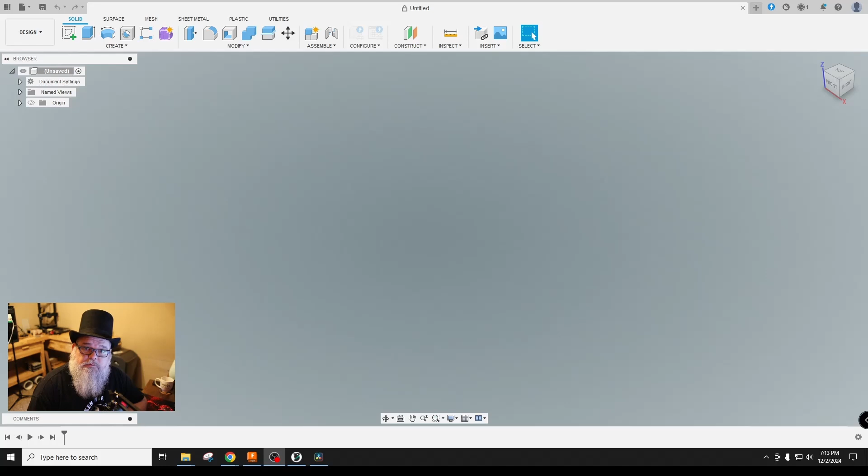We're going to model up a little phone stand. Sound good? Okay, here we go.

We're going to start the sketch on the bottom plane. I'm going to start out with some construction lines. Go 125 by 90. Stretch that dimension out just so it doesn't get in the way. And this one is going to be 40 by 0. Looks good.

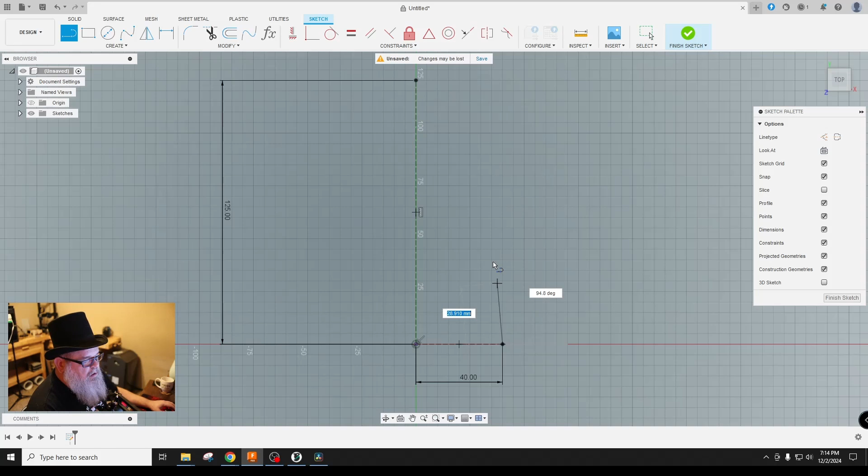I'm going to drop that dimension down below. Turn my construction line off. And do a line from the end of the 40 to the end of the 125. And then I need to mirror that one line, using our construction line as a center line. Just like that. I'm going to throw a radius on top of this.

That is a really big radius. We're going to go 10. Sound good? Sounds good.

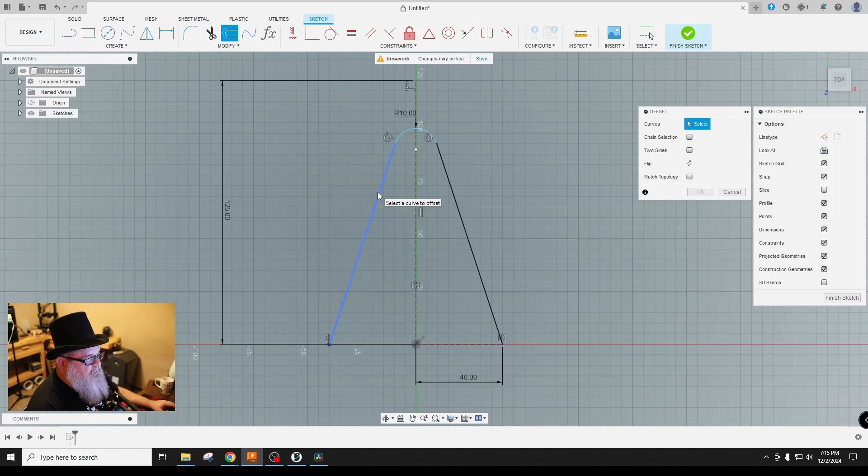Okay, our next step is going to be to offset. We need to make sure we're offsetting the chain. We're going to offset it by 5 millimeters. I want to have a little bit of meat to be able to lay this down on the side to print.

And I'm going to draw a line out there. It'll get trimmed up. Then we're going to come over here. I'm going to draw another line. I'm just going to drag it out this way a ways. That'll work.

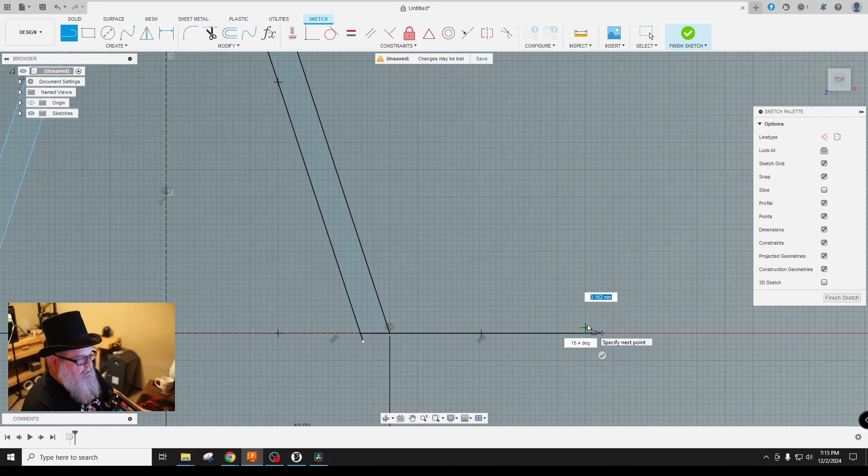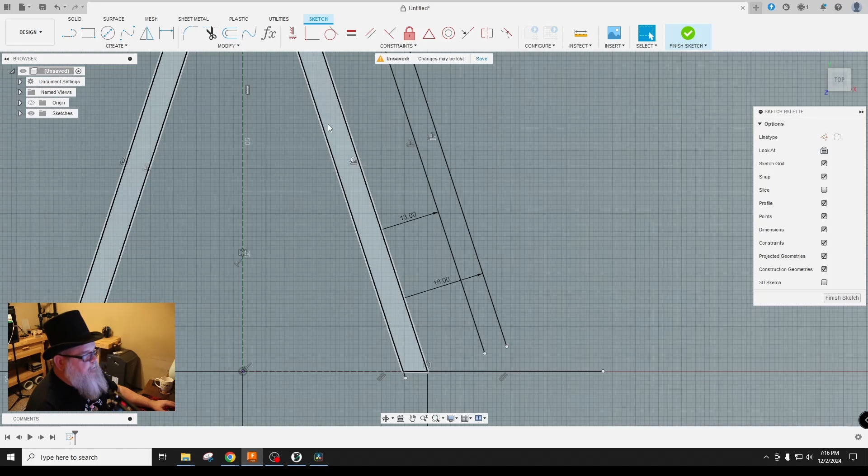Okay, now we need to do a couple more offsets. But this time, instead of offsetting the chain, I'm going to offset just the one line, by 13 millimeters. I'm going to do another offset of that line to 18 millimeters. I'm going to offset the bottom line by -5. And one more time by -13.

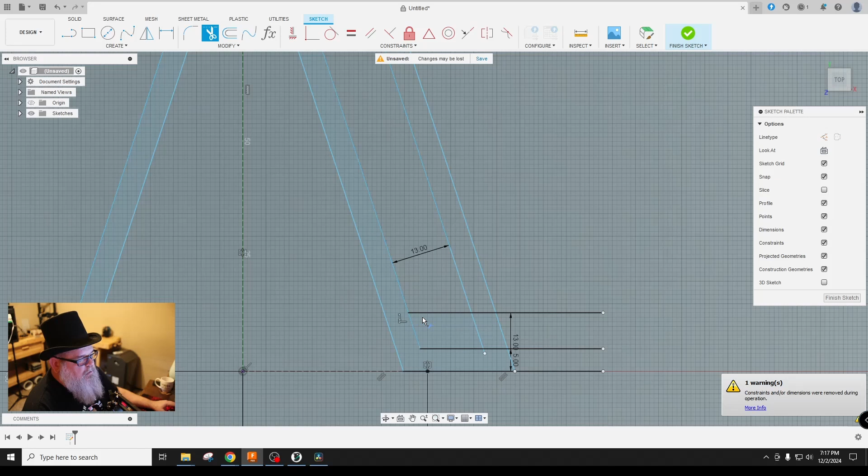I want to extend this line down to there. Now we're going to do some trimming. Trim those two lines to where they meet up. Trim that one. That one, that one. Boom, boom.

All right, there's our basic side profile of our phone stand.

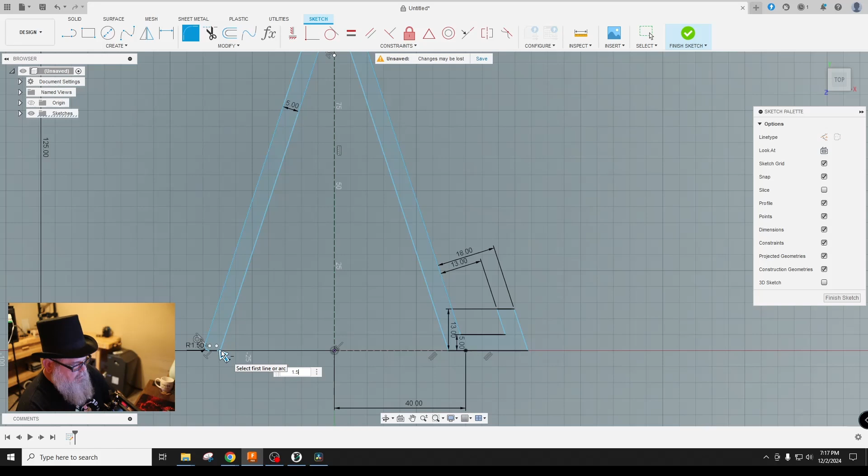Next thing I want to do is add some more radiuses, radii. Radius that one by 1.5. I'm going to do this one by 1.5, so I get some nice little radius corners there.

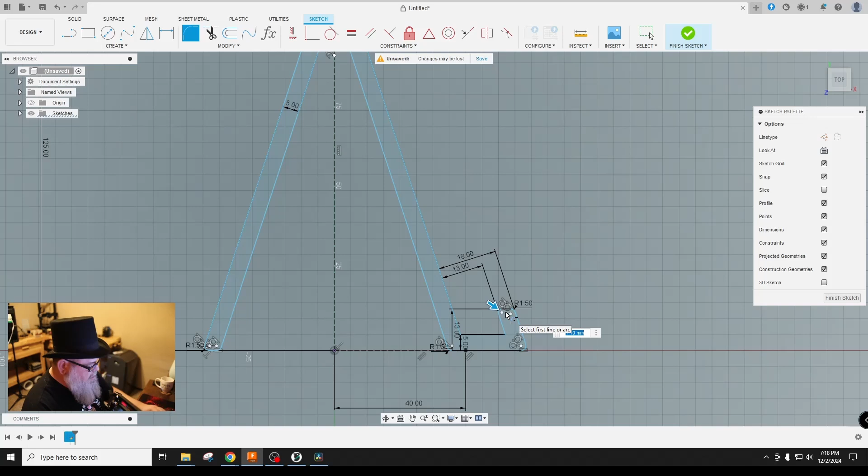.5 on that one. 1.5 on that one. How about we radius that by 1.5? Just type in 1.5. Radius this corner by 1.5.

Now this one here, I'm going to radius it by 2. And that corner there, we're also going to radius by 2.

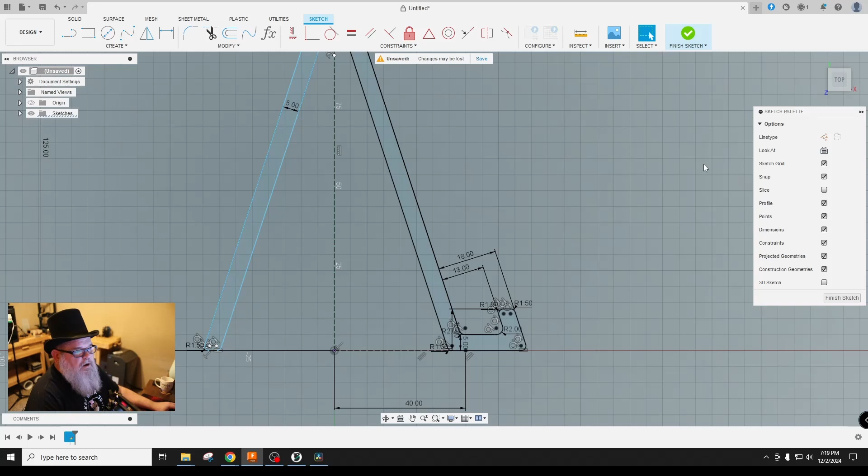Okay, so that takes care of our side profile, and that takes care of our sketch. So we'll finish the sketch, and we'll go extrude this puppy.

And we'll go 75 millimeter. Oops, if we're actually on the box, 75 millimeters. Boom.

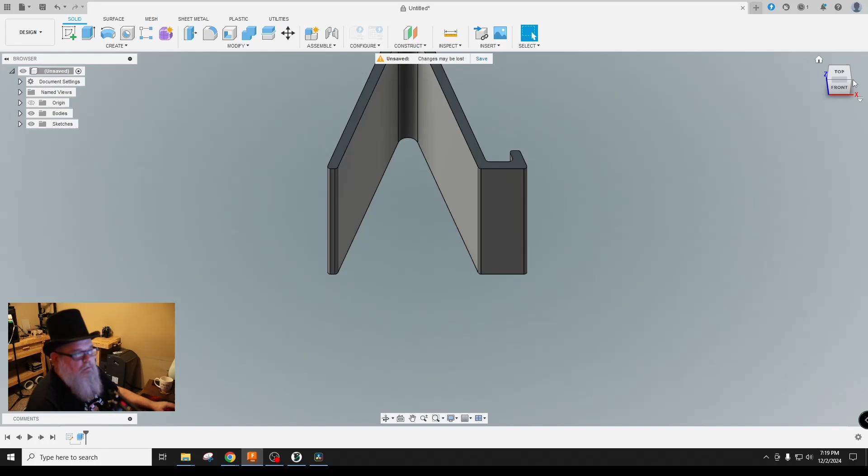All right. Looks pretty good so far. Now I can print it like that. It's going to use a lot of filament. And I want to kind of jazz it up a little bit, for lack of a better term.

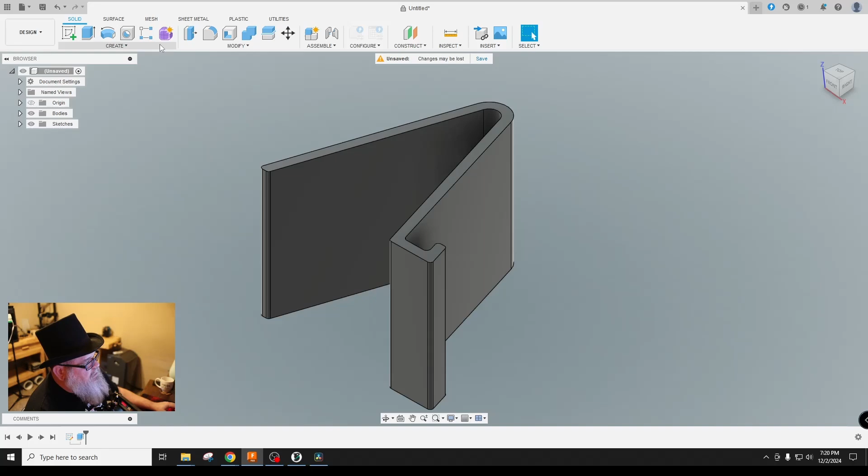So we're going to do another sketch, on this face here. And what we're going to do, we're going to do a construction line, and we're going to find the center point. So whenever you get that little triangle up there on that line, that means you're at the center point of that line.

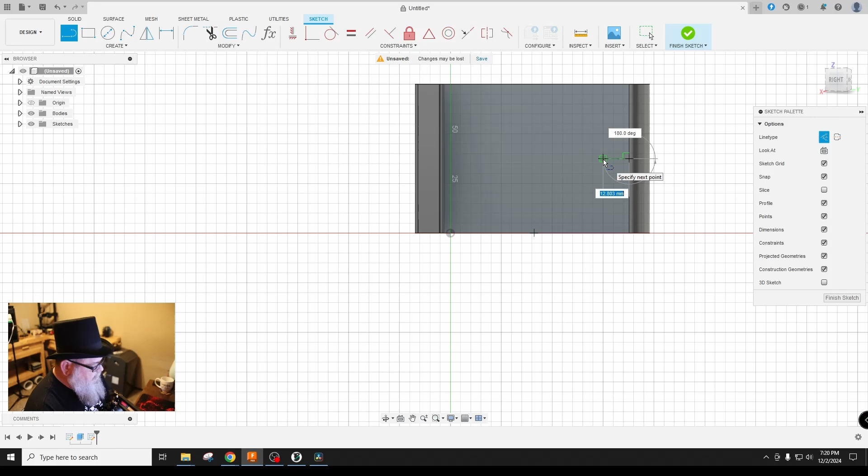We're going to go this way. Let's go, 13 millimeters? And the nice thing is, this is why I'm doing it this way.

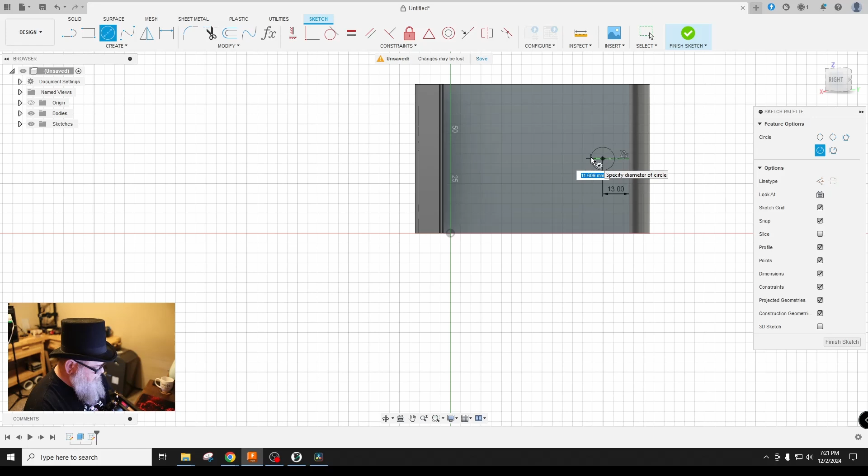I'm going to do a circle. Take the construction line off. And we'll go, let's say, 18 millimeters. It looks like that might fit pretty good.

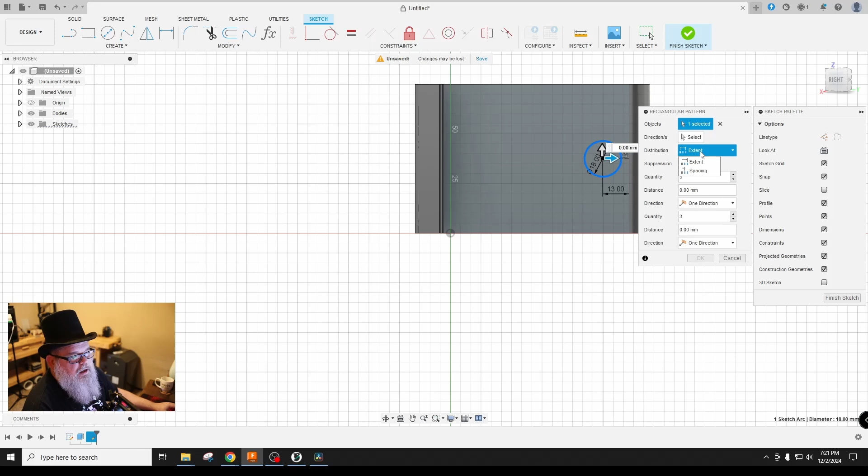All right, so now what we're going to do is we're going to create a pattern, a rectangular pattern of this circle right here. And we're going to take it this way. I'm going to go with 4, maybe. Oh, no, that needs to be 3. That's the vertical.

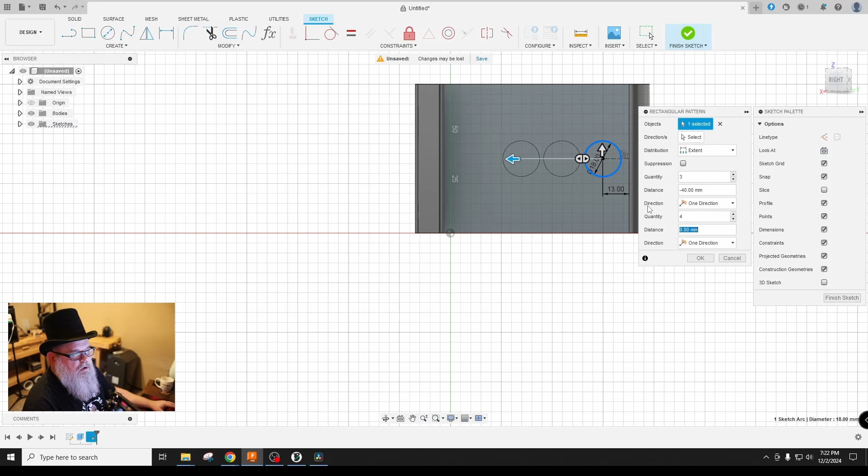Nope, I was right the first time. Yeah, that looks good. Now on the bottom one, we'll go symmetry.

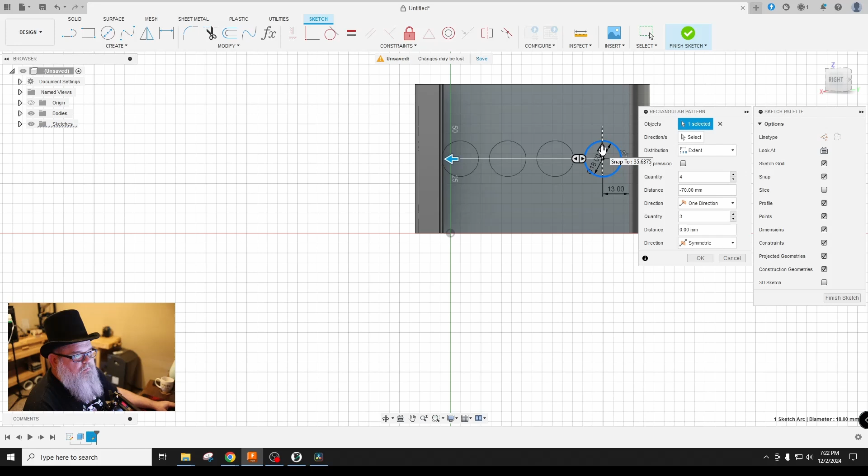So that we drag it out, it goes both directions. And I think that right there, yeah, that looks pretty good. Go with that.

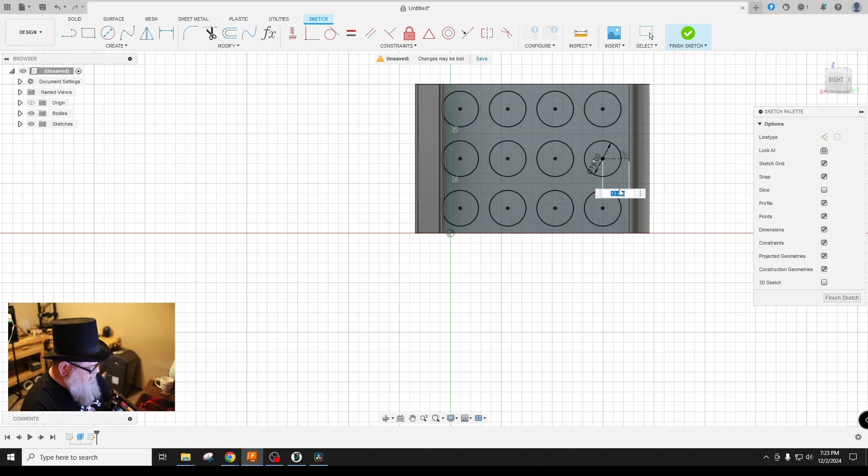Now, the reason I used the construction line up here is if that didn't look quite centered, what we could do, just double click on this dimension and we can make it 14. And that moves the whole pattern down. I actually think I'm going to leave it there. I think that looks a little better.

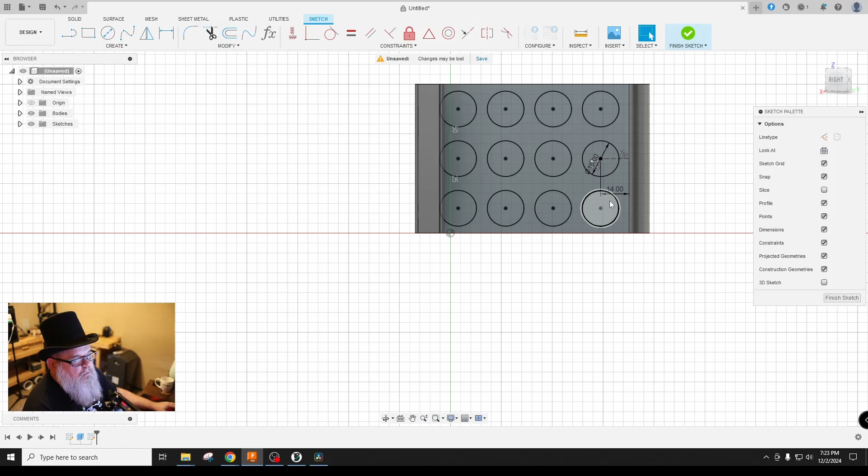I could also change the diameter of the hole if I wanted to. I don't need to, so I'm not going to. But yeah, I think we'll call that good.

So what we need to do now, back to the top, I'm going to flip this up right. I need to, oh, I don't need to because it's on the center. Okay, never mind. We'll flip it this way and we're going to extrude.

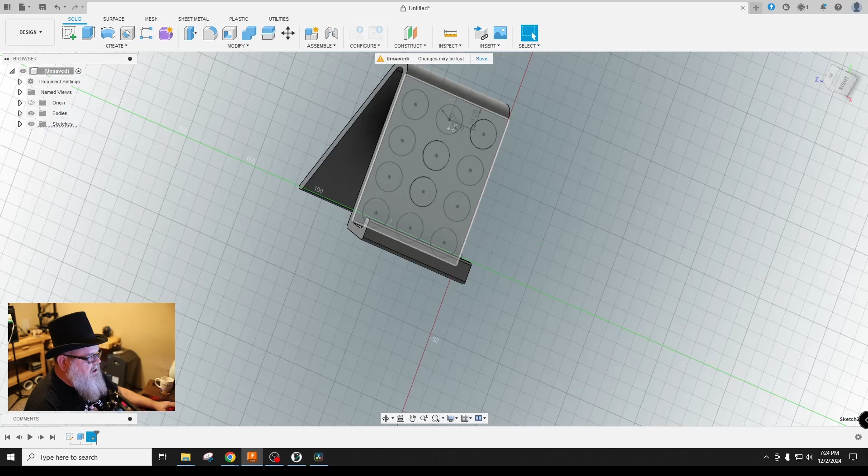No, we're not. Because now that I have this angle, see how close it is to that radius? That is too close. So we'll go back to this sketch right here. Let's cancel my extrude. We'll right click on that sketch, edit sketch, and we're going to move that back up.

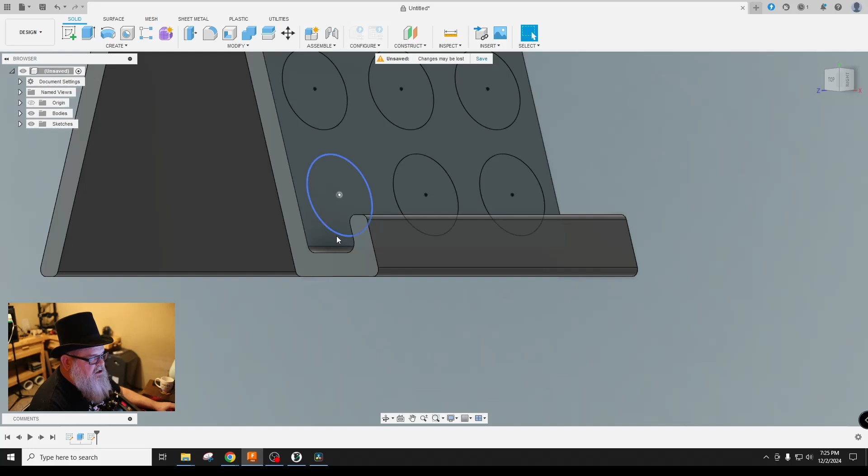Yeah, we'll put it at 12. And we'll click finish sketch. And now if you look right here, we've got a little bit of room between our radius and our circle. So that's a good thing.

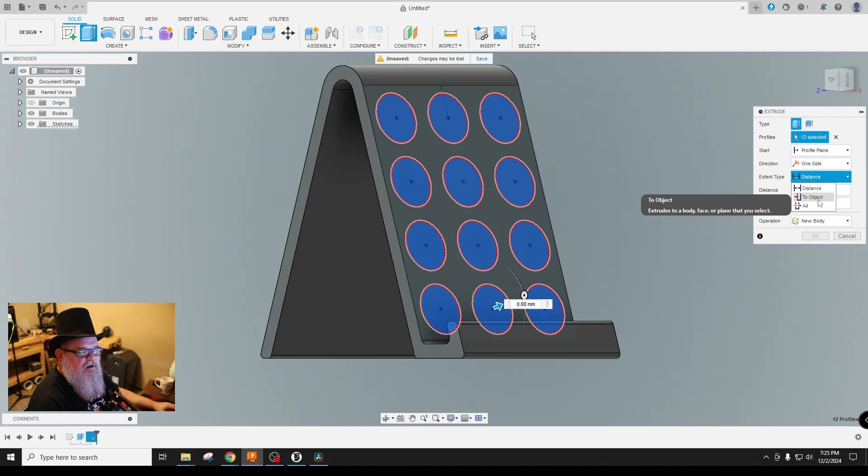And then we're going to extrude all 12 of our holes. And instead of going a distance, we're going to go to this back surface, and it will be a cut. Click OK. And that takes care of all of those.

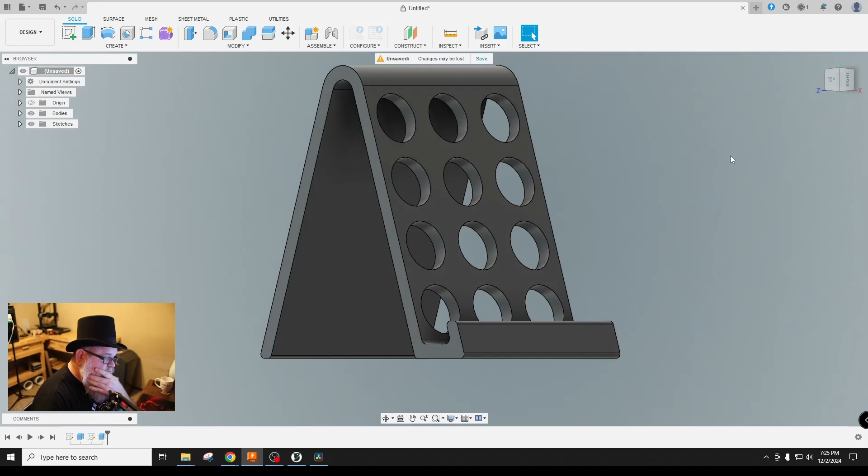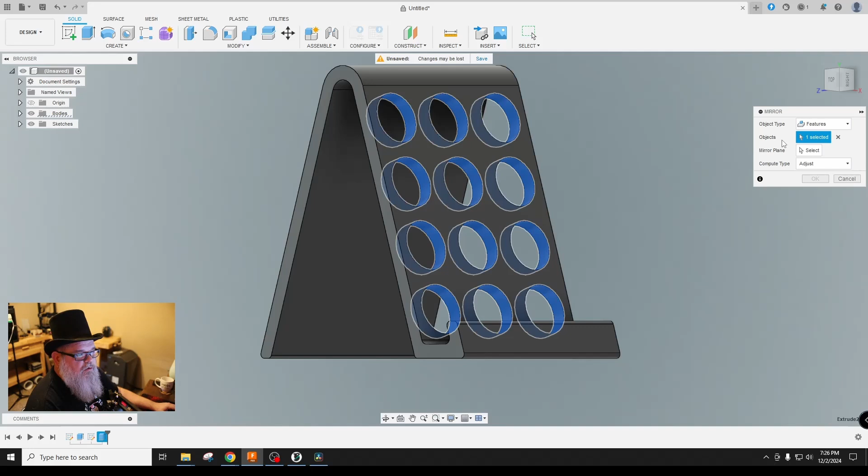All right, so that's pretty good. Except I want those holes on the back leg as well. So what we're going to do, we're going to create a mirror of features. We're going to go all those. And we're going to select the plane.

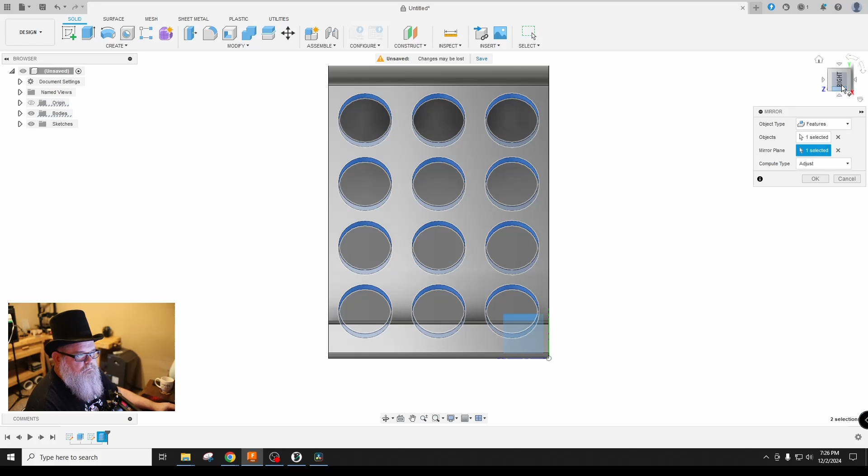Boom, there we go. So now we got holes on the front leg and the back leg. Looking pretty good.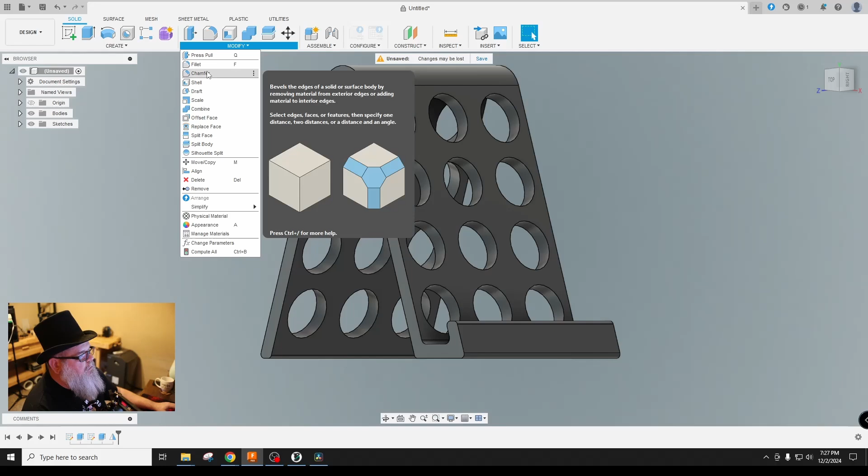I want to fancy that up a little bit. So I'm going to put a chamfer at the front and the back.

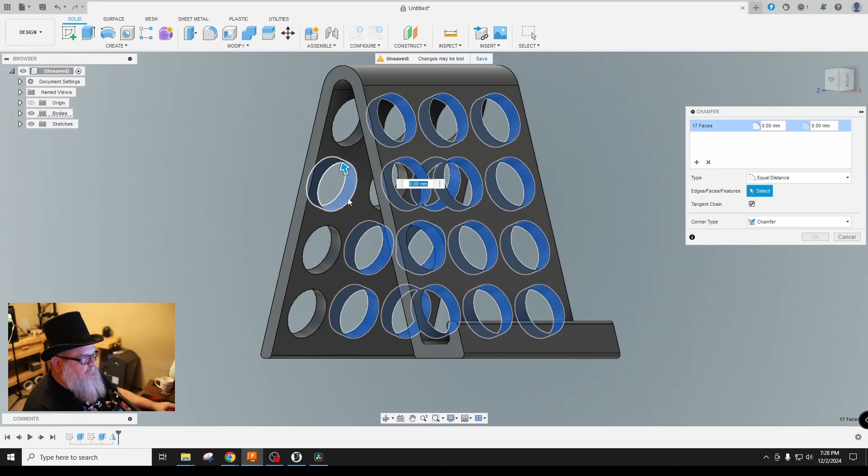Flip this guy around so we can get all these also. This is 5. How's a 2mm chamfer look? Yeah, we can go with that. I think that looks pretty slick. I could also do a radius, I've already got one that I did a radius on, so I'm going to give it a shot with a chamfer.

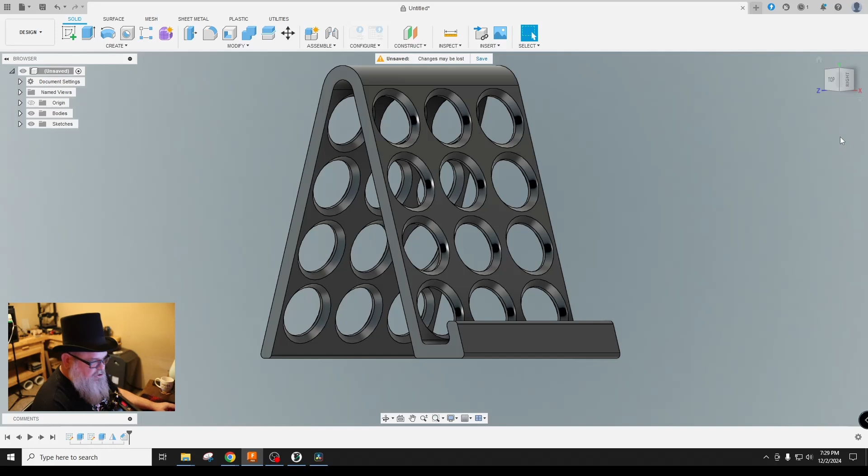Now, just because I've had some issues in the past printing stuff like this where the one leg breaks free from the build plate and the other one does not, I'm going to add a little bit of structure between the two legs. I don't want a lot, just something that's going to hold.

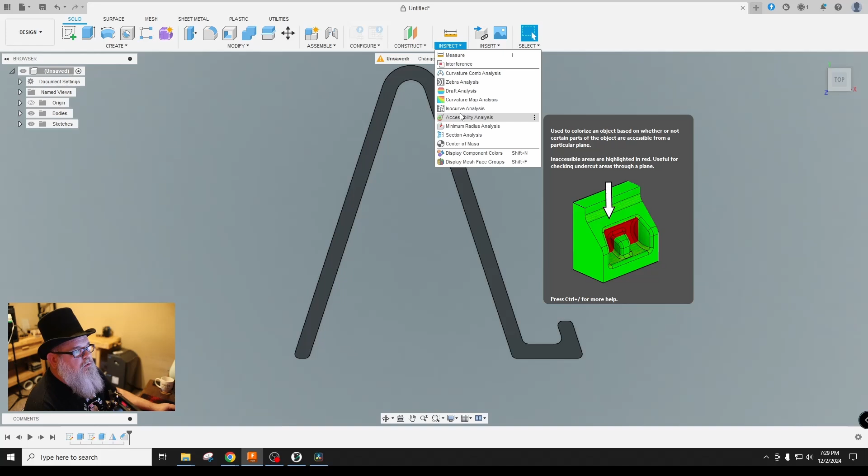So what we're going to do is create another sketch. Now, before we do that, we're going to do a section analysis.

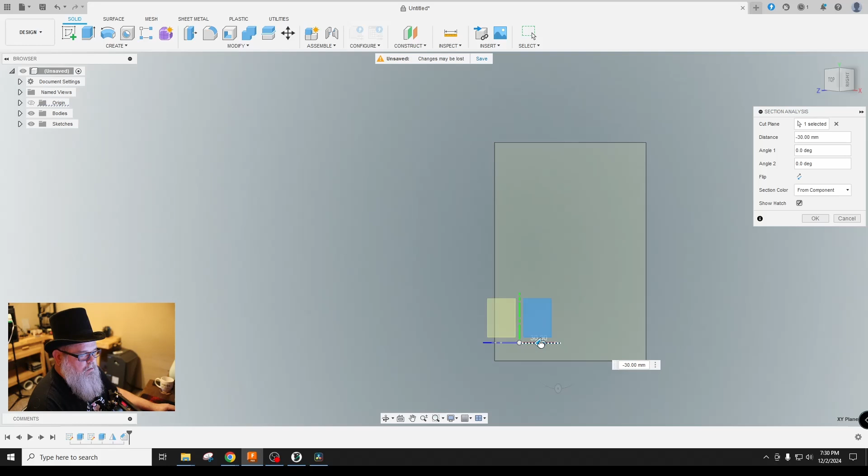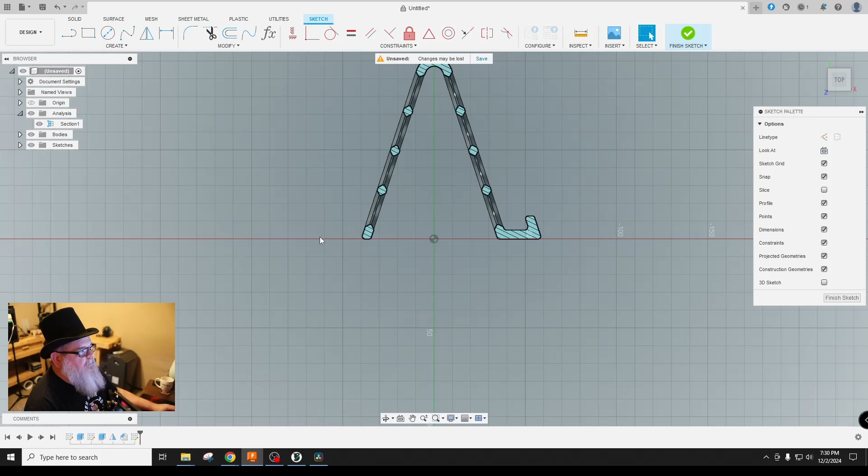We're going to put it right there in the middle, and we're going to momentarily turn that off. We're going to create a sketch on this surface, and we're going to turn our section analysis back on. I want that cross piece to sit right in here.

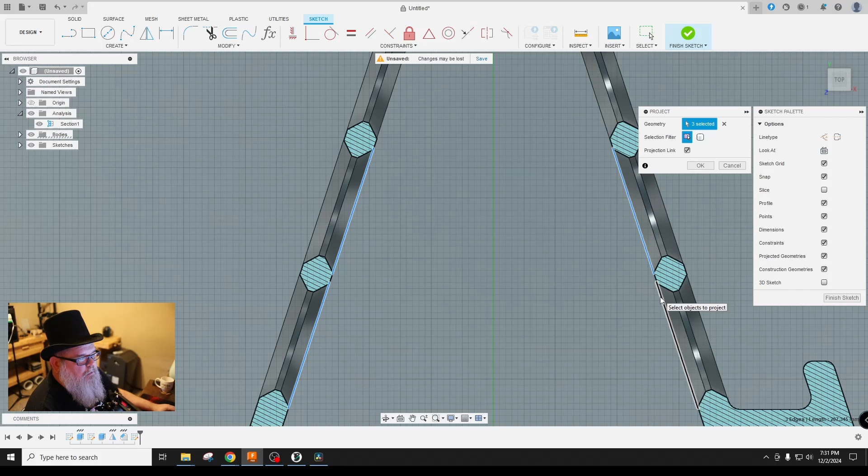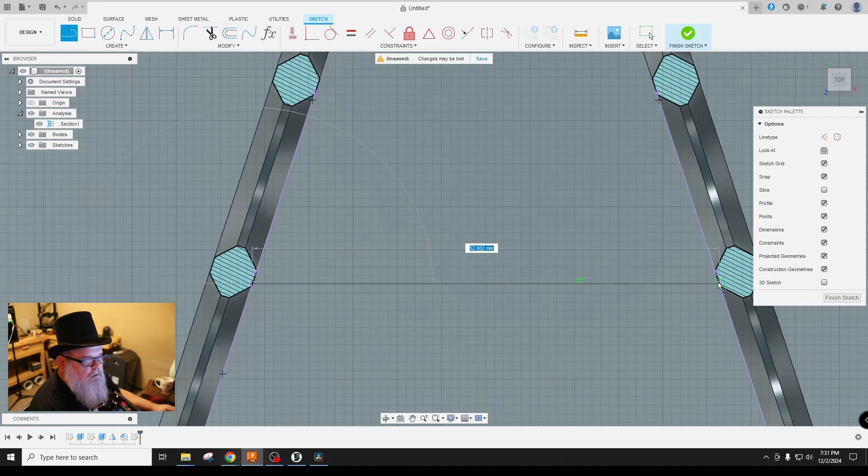So we're going to create a projection. I'm going to project that point. Okay, fine, we'll do that, there we go, we'll project those onto this. Now we will draw some lines. Go from that point to that point, from there to there, to there, and back to the origin.

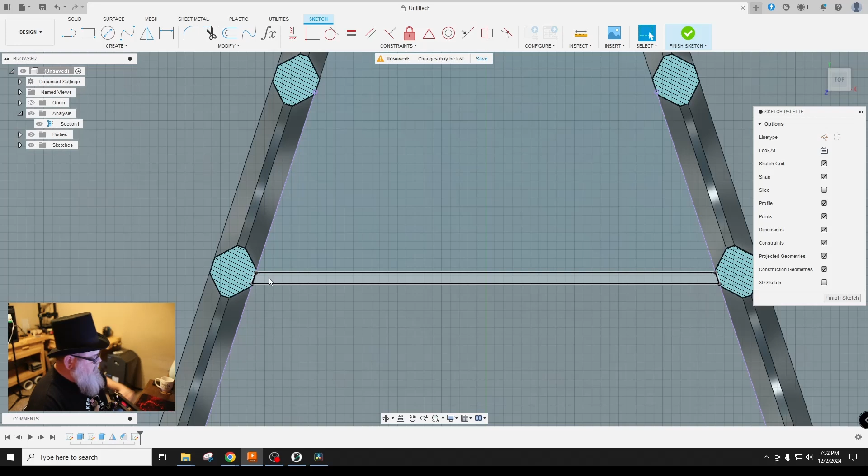Okay, now we will finish sketch. We will turn off our analysis. We'll extrude that shape there.

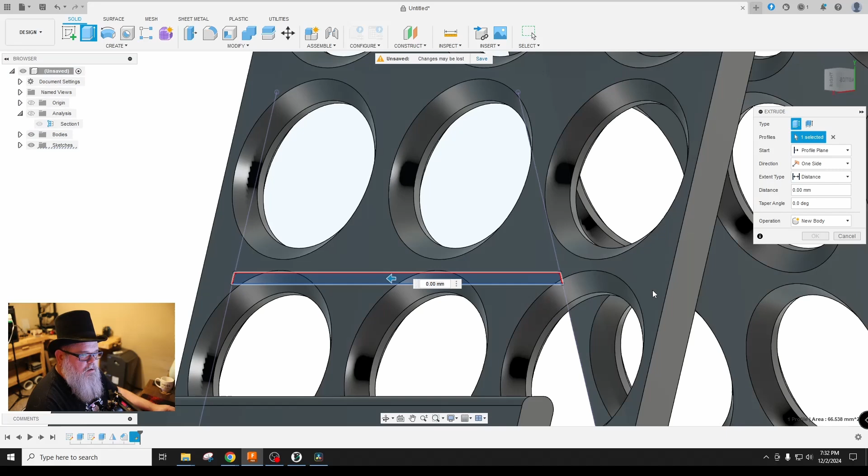And to make it easy, we're going to go to this object here. Join is fine, there we go. So now we essentially have a little shelf inside, but it's going to print solid.

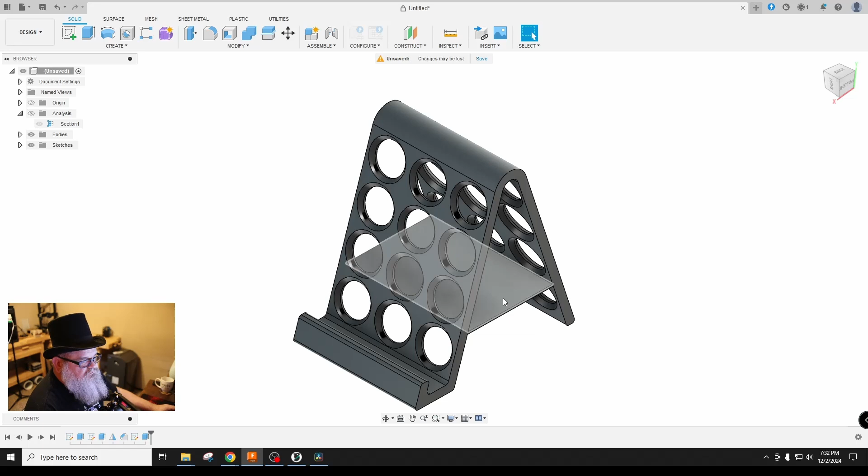Not a problem, we could print it solid, but I'd rather it not be solid. So we're going to create one more sketch on that surface right there. We'll draw one construction line from the center to the center, and then we're going to do a circle on that construction line, right in the middle.

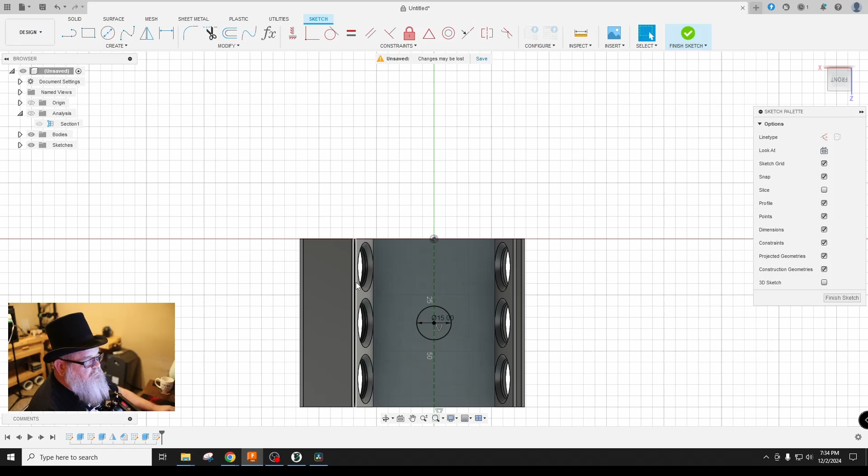I think 20 is too big, so we'll try 15. We're again going to do a rectangular pattern. On this one we will do symmetric and symmetric spacing.

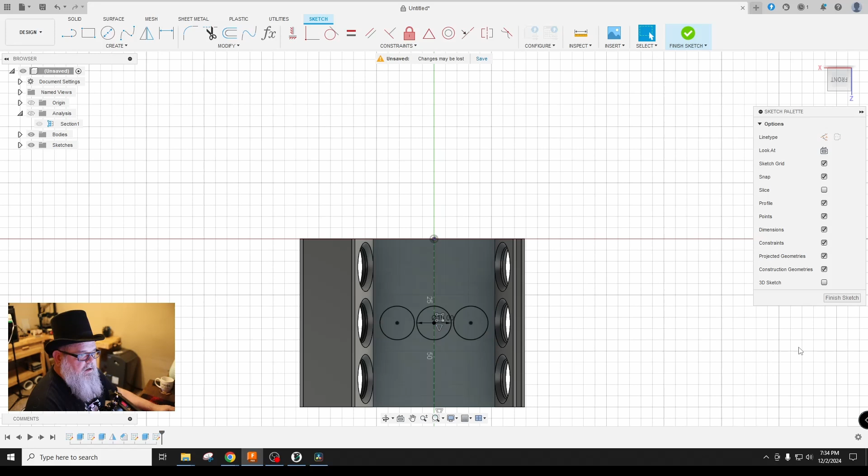We would go... well, that didn't work. What happens when you get in a hurry with the keyboard? Let's try this one more time.

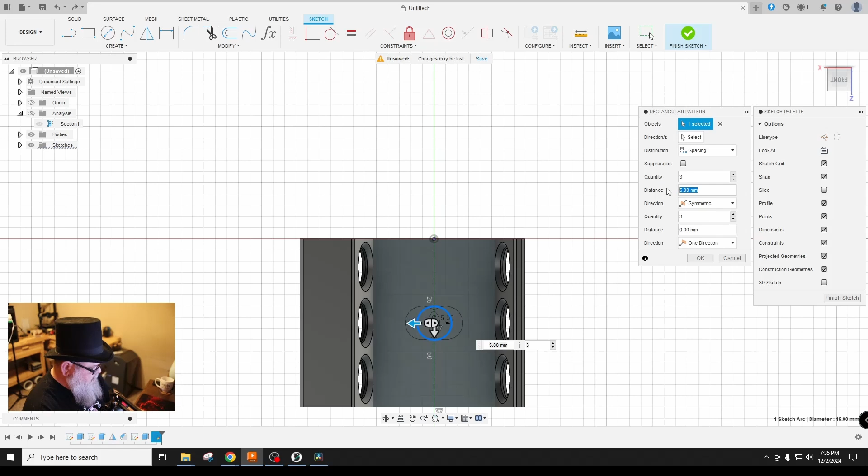Okay, we're going to go spacing, need to go symmetric. We're going to go 16. Nope, 17. 17 looks good. See if we can get 5 in here. I don't think we can at 17.

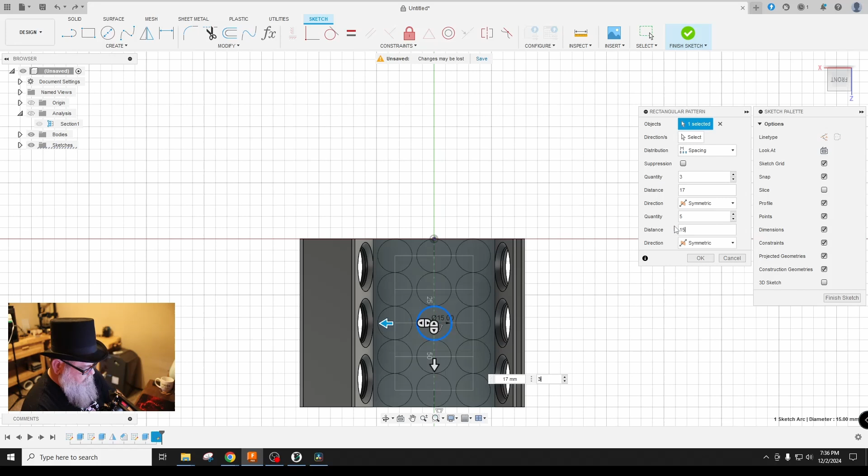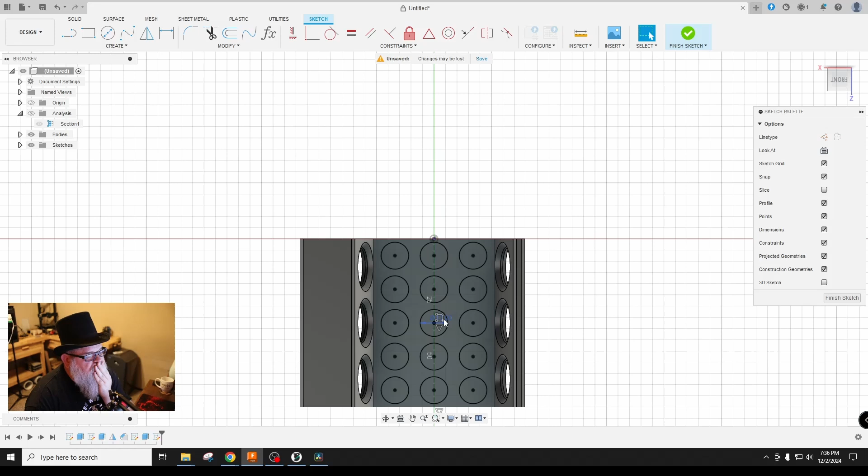No, but what we could do is go 15 and 17. And then we'll change the diameter to 13. With 12... yeah, I think that'll work.

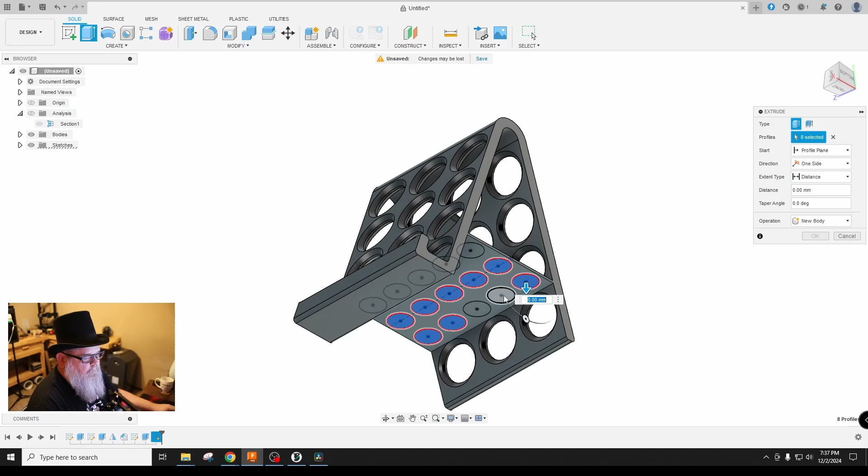Okay, and we'll extrude. We'll extrude all those holes to an object.

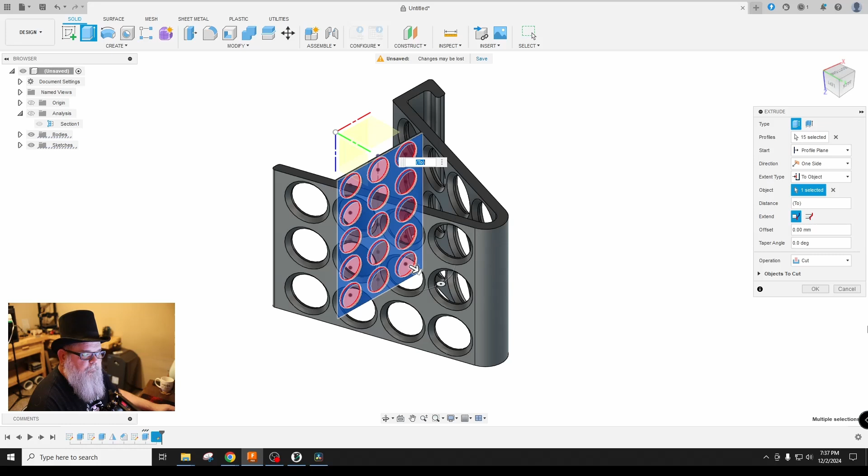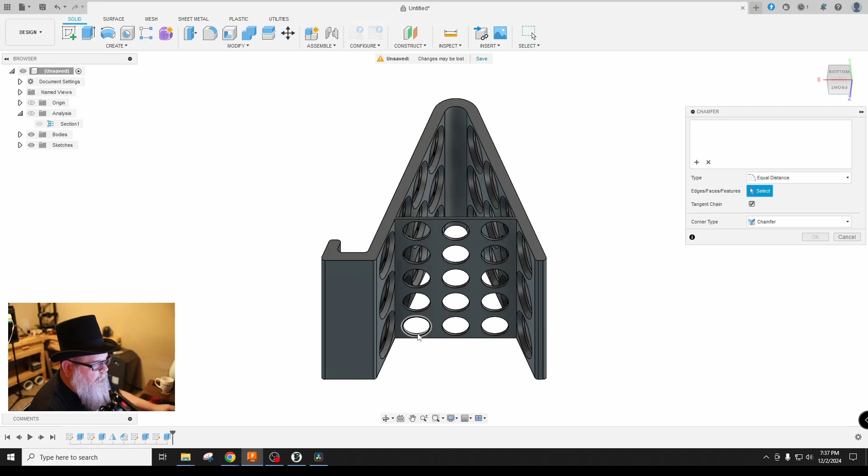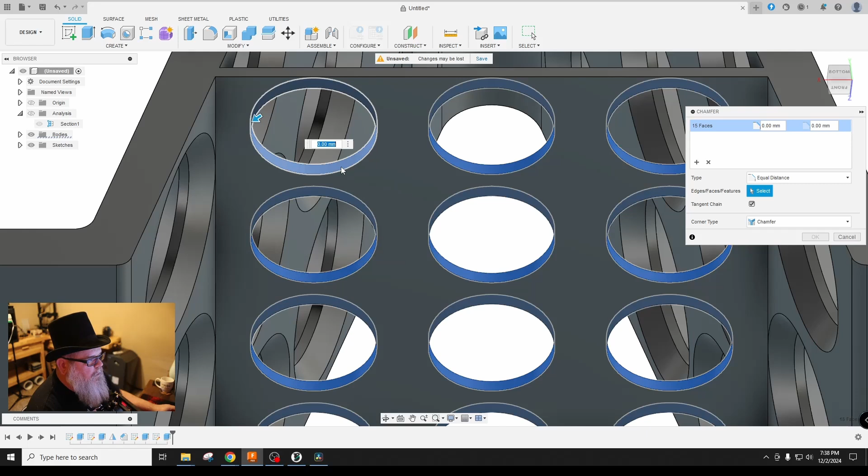Okay, there we go. Now I wonder if we can get away with doing the chamfer on those. Get all those selected, and then let's try a 1. Nope, okay, let's try a 0.5. That works, that'll work just fine.

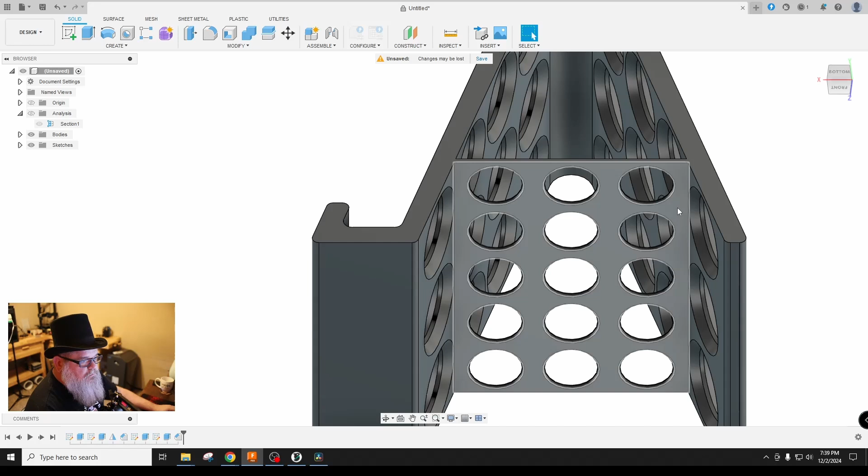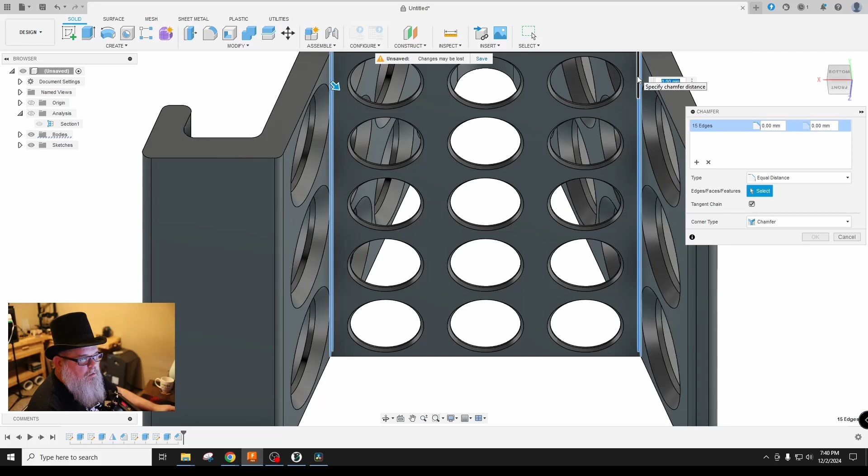I mean, we could maybe, I don't know if it'll work or not. Yeah, I think it will. We'll find out here in a second. See if it'll let me put a chamfer on those. Yes, it will. All right, so we'll throw a chamfer on that, it'll add a little more rigidity.

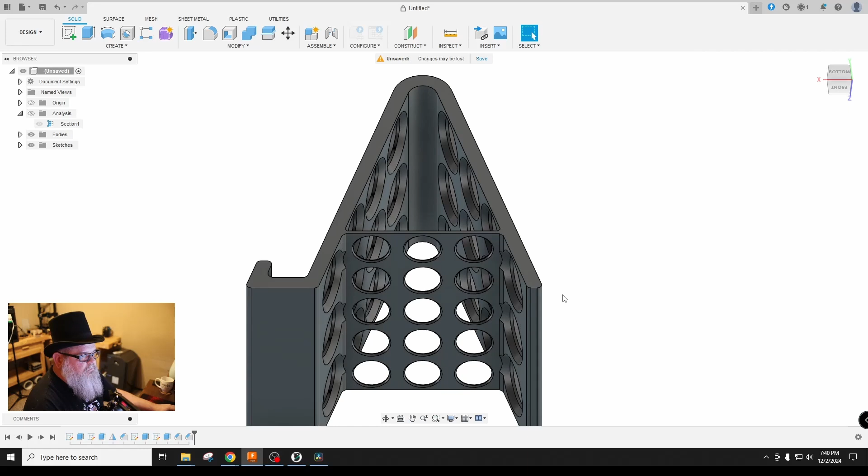And then that's pretty much it. So we'll get this saved and exported.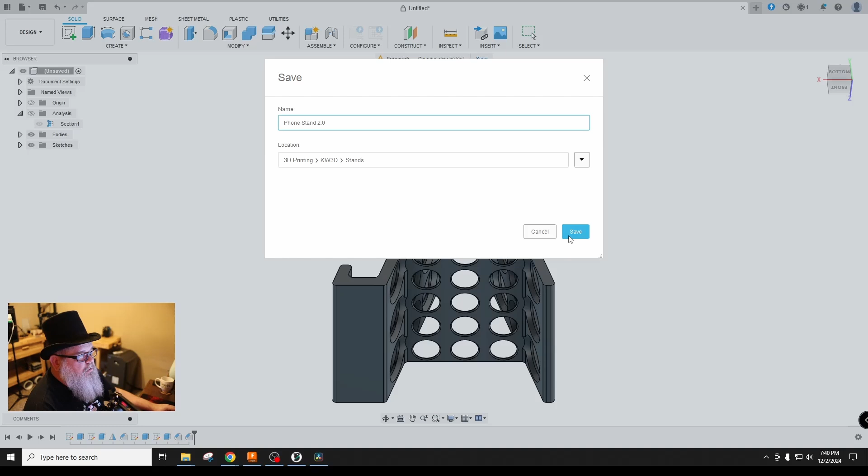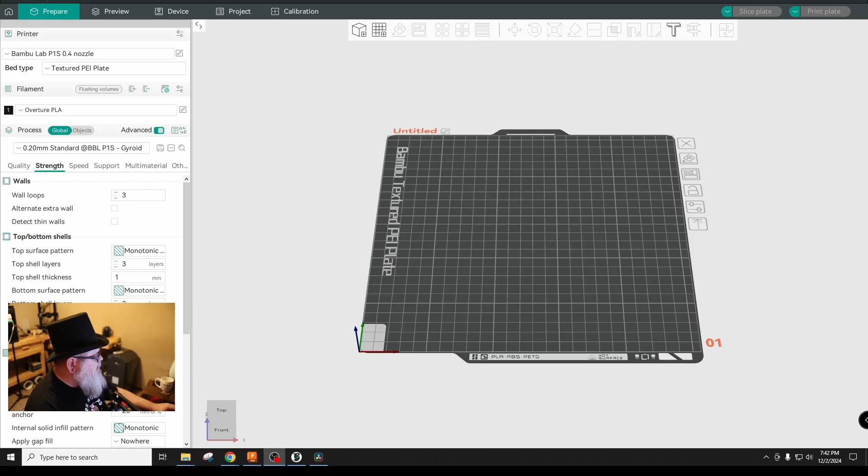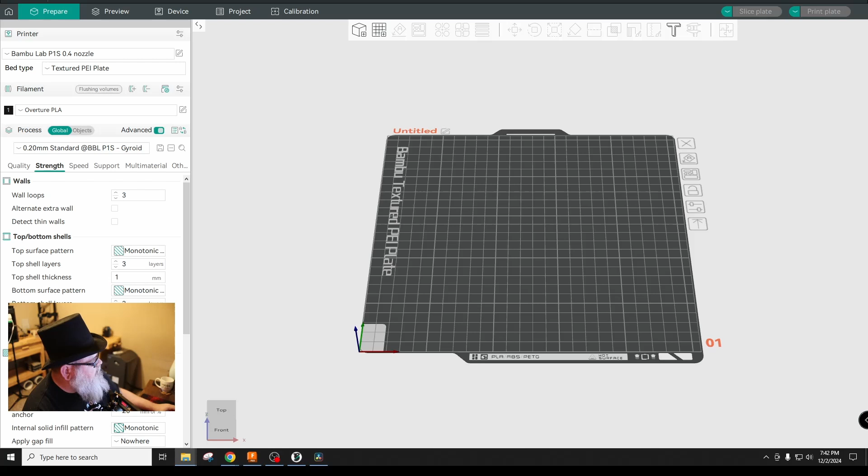All right, I know that wasn't a few minutes, it was more like a few seconds. But here we are, we've got our Orca Slicer open. Let me go grab the file and drag it in. Boom, there we go.

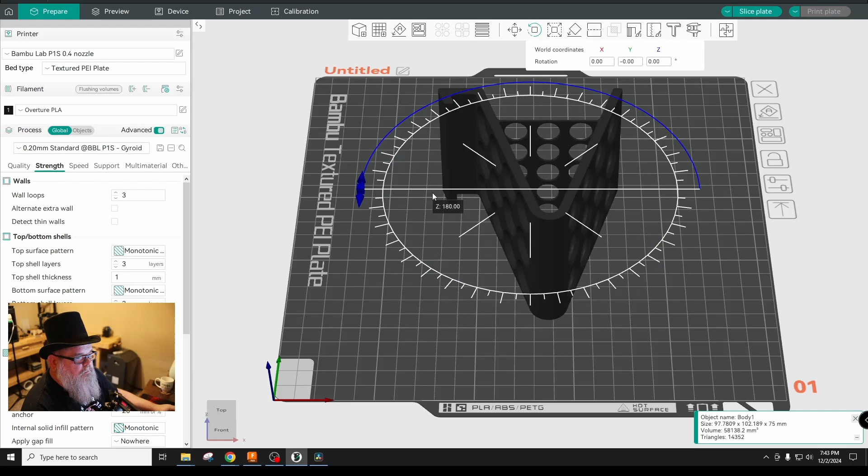And just for sake of interest, I'm going to rotate this around. Yeah, we'll see if that looks like that'll be a good angle for the time lapse.

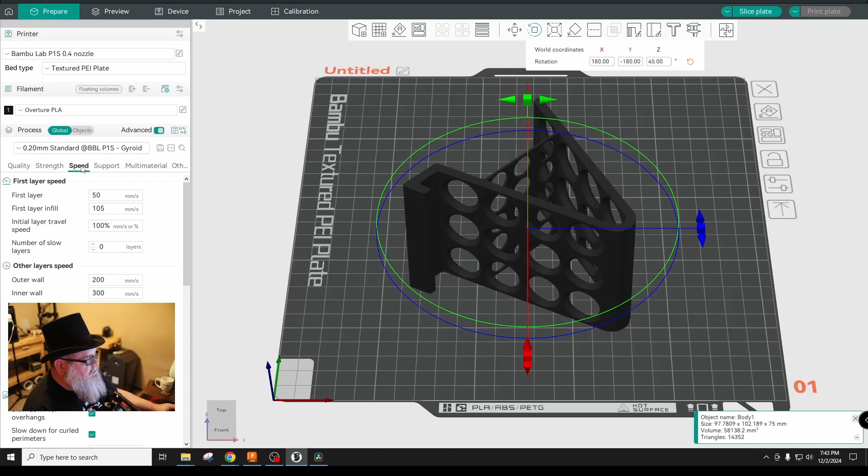Quality's good, strength good, 10% gyroid. We probably don't need 10%, but I'll leave it. No supports, speed's good. Let's go ahead and slice it and see what that gives us.

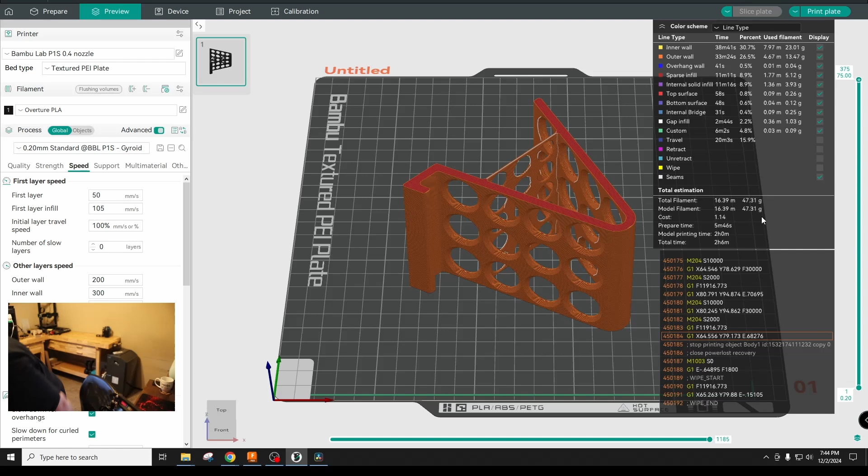We got 47 grams. Let me go check and see if I have that much filament on the roll in the printer. I am pretty sure that I have enough filament on the printer.

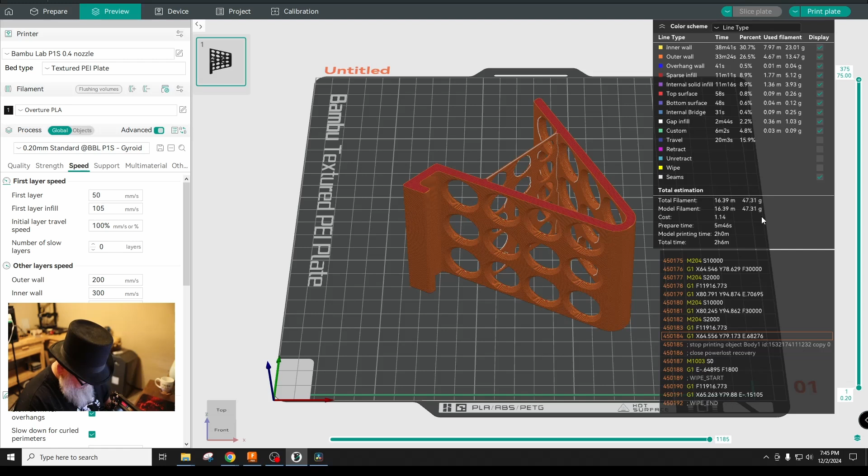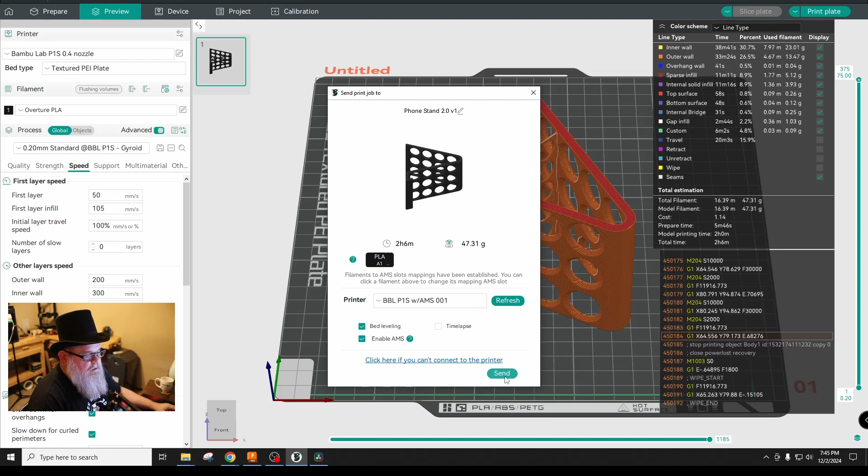This is going to be a 2 hour, 6-minute print. Let me get my time lapse set up. Time lapse is set. Print plate, 2 hours 6 minutes total. Prep time's good, let's send it.

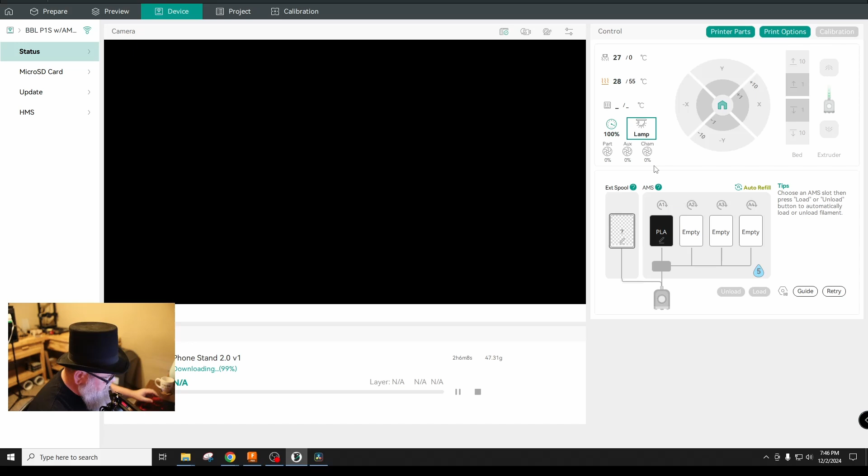And hey, editor Craig, hey, wake up, you got to do the time lapse thing. Yeah. Thank you, it's impossible to hire good help around here. We'll see you in a few.

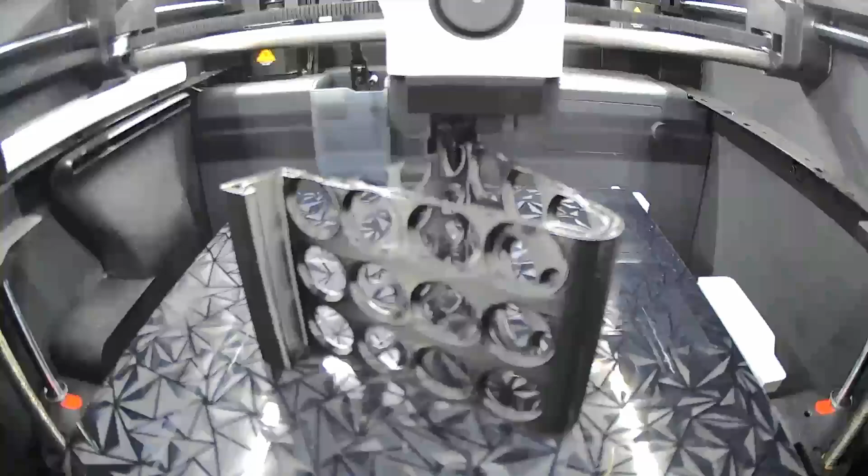And that's how I designed, sliced, and printed my new phone stand.